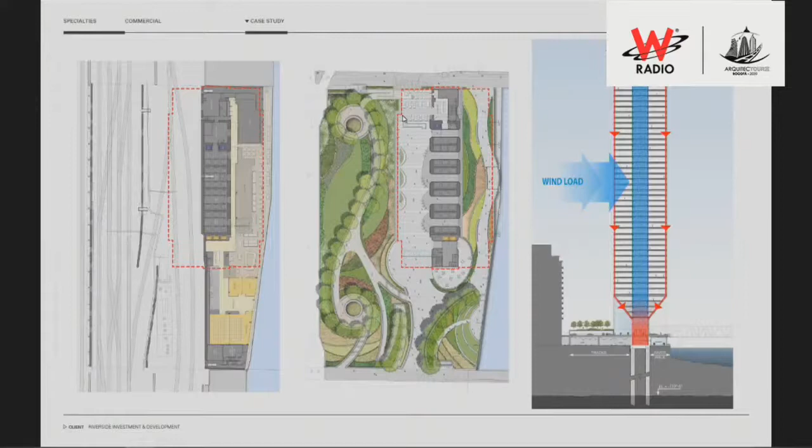So working with Magnusson Klemencic, a very well-known structural engineering firm, we developed a vertical structure that is only 40 feet wide, approximately 12, 13 meters wide, and all of the load comes down into that. And that allows us to then put a park over the railroad tracks and create a building that you can see here. It's a wonderful addition to the skyline of Chicago, and Jim Goettsch designed a very innovative solution.

A second building that is almost complete is very near the first one. It's across the river. It's 153,000 square meters, approximately the same height, 54 stories, and it has some of the same features. We didn't have to deal with railroad tracks, but we still had to provide a river walk as required by the city of Chicago.

And this shows you a good example of how we solved that. In this case, we did not choose to bring down just a core. We were able to bring down columns and collect them at the bottom.

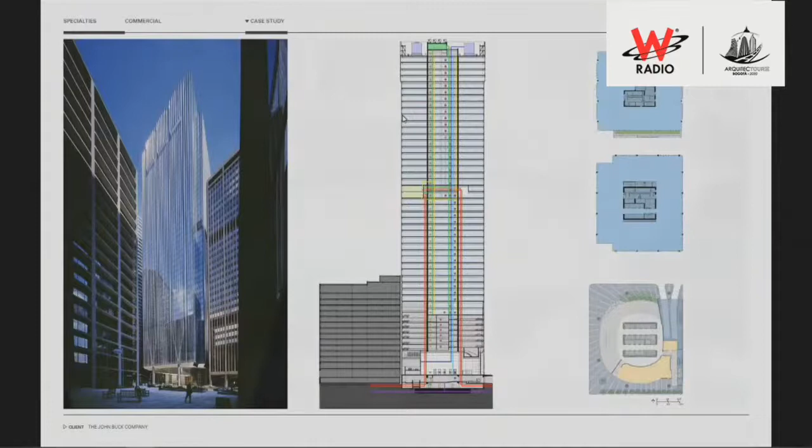111 South Wacker was another building that we had completed approximately 15 years ago, 135,000 square meters, also in the 53, 54 story range. And what was special about this is that the parking is located above the lobby. And what we did, you can see there's a band of parking in the gray, and we created a ramp, an auto ramp that became part of the lobby and became a design element, and yet created a very unique lobby that we think proves to be a very interesting view.

The columns are all gathered and come down into only 8 places for this very large building, but that creates a very open base on what was a very tight and closed site.

300 East Randolph is the home of Chicago's Blue Cross and Blue Shield facility, which is a health insurance company. And they came to us back in the early 1990s, 25 plus years ago, and said, we need to build a corporate headquarters, but we want the ability to be able to add to it. So the initial phase was 132,000 square meters, but the ultimate build out is 218,000 square meters, 57 stories tall.

And what we did is we planned in the first phase the positions for the elevator banks that would allow the building to rise to a new height. And you can see in the picture on the left how the first phase is complete, fully occupied, 4,500 employees, and construction of the second phase happened 10 years later and was done while the building was fully occupied. And then that middle picture shows you the complete building.

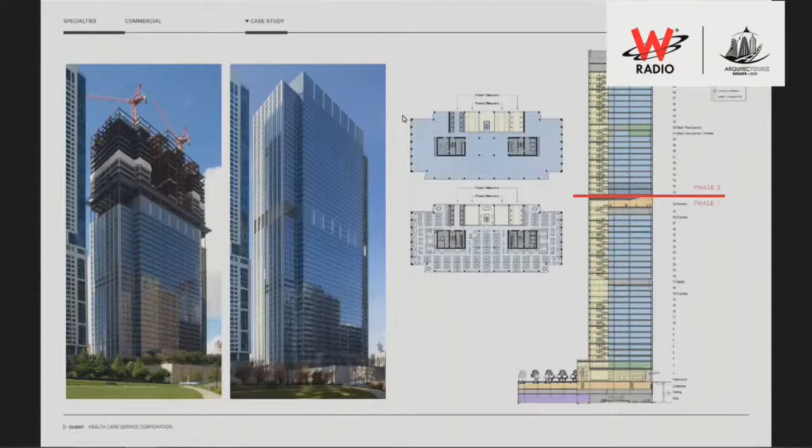And what's happened is that instead of expanding, it turned out Blue Cross Blue Shield found some of the very best tenants in Chicago because this building has a beautiful view of the park. And you can see it here. Millennium Park is in its foreground, and how it sits compared to other buildings, and the beautiful views from it.

We recently completed a project in San Francisco, and this is the Park Tower at Transbay. It's part of a new section of the city. It's only 45 stories and only 75,000 square meters. But what's interesting about this is that this building was fully leased to Facebook before it was complete. So a very good success story for our developers and a very nice project.

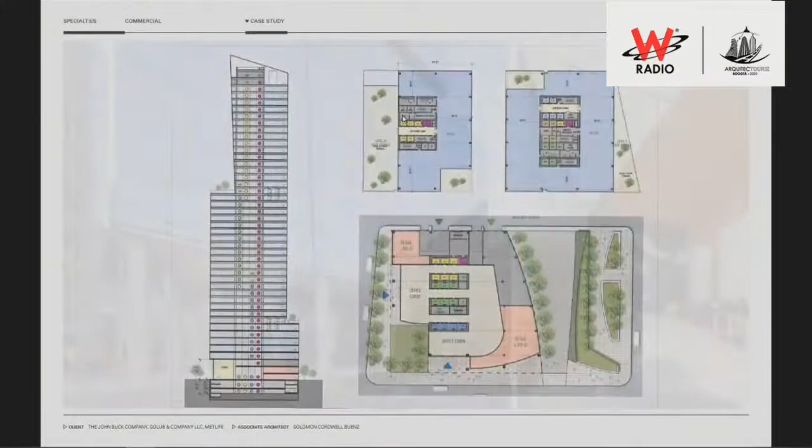San Francisco's climate is a little bit more temperate than Chicago, so what you see are open terraces, which were very attractive to the tenants. They love the ability to have their employees go outside, and here's a good example of that. We built a windscreen so that everyone would be comfortable there, but you're out in the outdoors and it's part of your floor, and it happens every third floor.

A different project for us was the Zurich North America headquarters, about 73,000 square meters. Zurich is an insurance company that does primarily reinsurance, and they're based in Switzerland, but this is their North American headquarters. And what was interesting is that this is sited on an expressway. It's right adjacent to it.

And what they asked us is, we want a billboard. We want, when people are driving on the expressway, that they turn and they look at our building and they can instantly see who we are and that it's something a little bit different. So these are other shots, other sides.

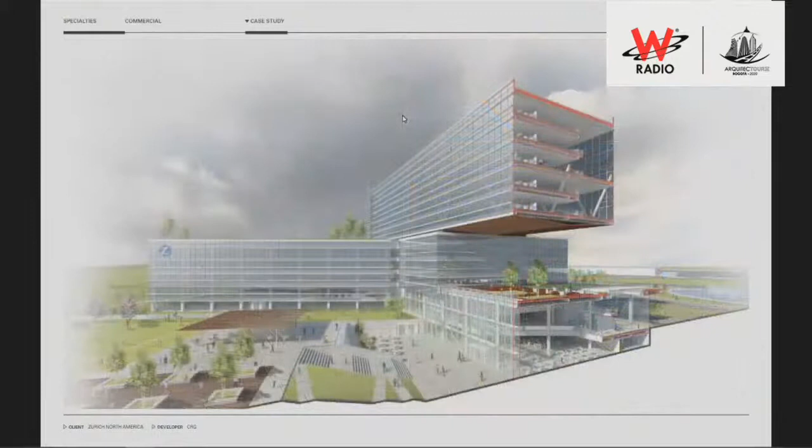And then the final product. You can see it's very striking, and as you're driving, you instantly realize what the building is, and it captures your attention.

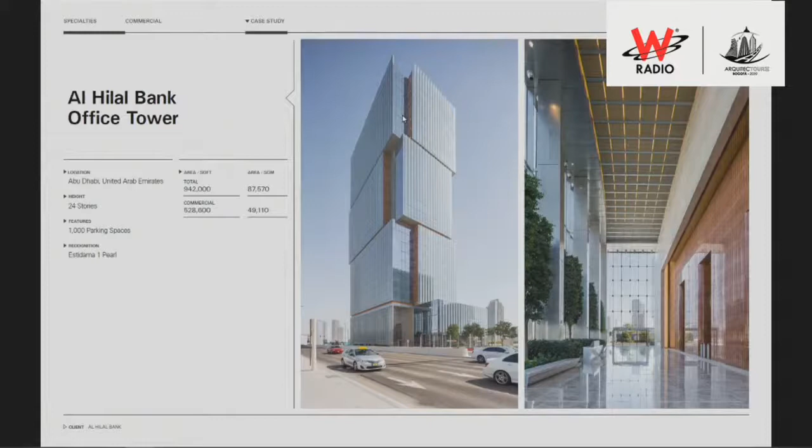A project in the Middle East was for Al Hilal Bank. This is a simple office tower, 87,000 square meters, only 24 stories, a fairly large floor plate. And they are renting this to commercial tenants. They are only taking a small portion of it. This was purely a development project for them.

You can see the large floor plate, column free from the core out to the columns at the edge, which is a hallmark of many of our buildings because that allows for very open planning and is easily able to be changed. They wanted a signature for their building as they were going to develop other buildings, and they really like the offset and the special lighting that happens. And they've repeated this now in their logo and in their other buildings.

A project that is just completed, one of my projects that I work closely with Jim Goettsch on, is in Warsaw, Poland. And this is 115,000 square meters, 35 stories. And the building was somewhat shaped because Warsaw has a sun requirement that you cannot shade other buildings for more than a certain number of hours per day. So the building has to be very carefully sited, shaped, so that you can achieve that.

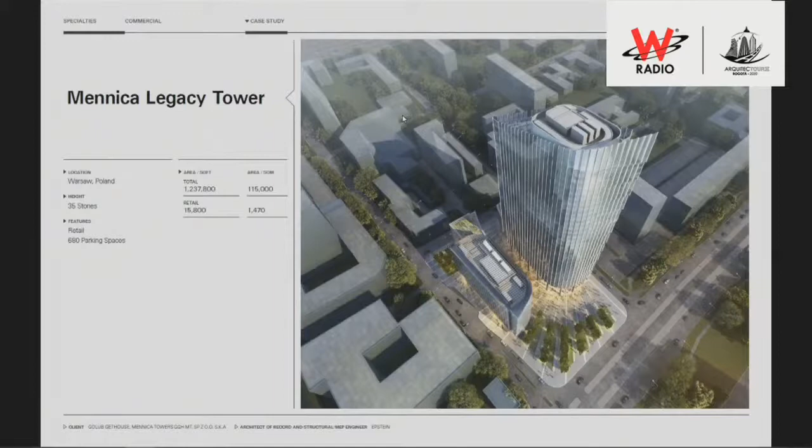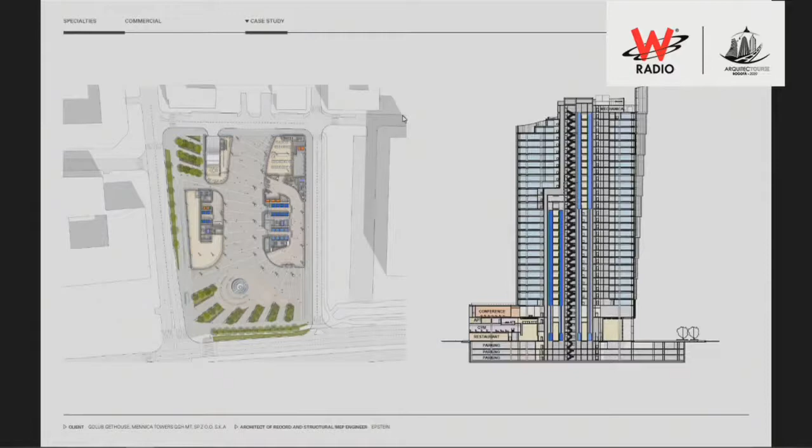And what we did is we broke the building up into two masses. One is the tall mass and one is a shorter mass. This building also was fully leased before it was completed. M Bank, which is a large Polish bank, is taking the tall tower. WeWork took the entire smaller building, as well as a health facility. And you can see it in its completion. Rendering on the left, completion on the right.

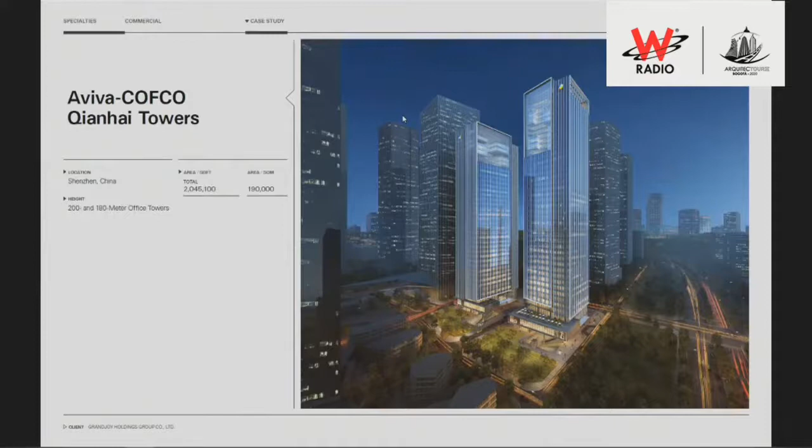Another complex, the Aviva-COFCO, which is located in Shenzhen, China, just outside of Hong Kong. And this is for 190,000 square meters in 2 towers. You can see a little bit of a different expression. Atriums within the buildings, which offer a lot of interest, and they're mostly located up at the very top of the building, so they have excellent views.

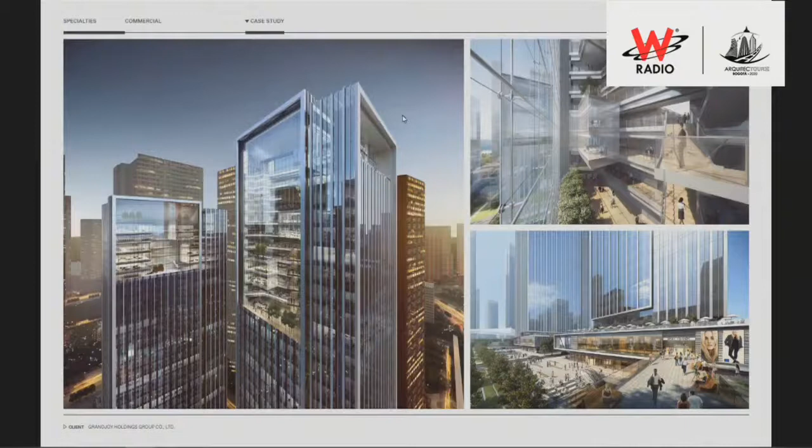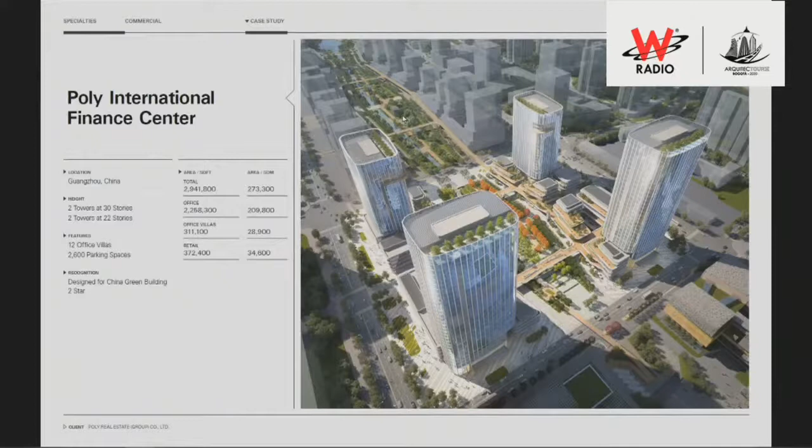Another project, 4 buildings, 4 towers, 273,000 square meters in Guangzhou, China, also not very far, an hour and a half by car from Hong Kong. I'm sorry, 2 at 30 stories and 2 at 22 stories on a retail base. You can see some of the detailing for that. The retail is particularly interesting.

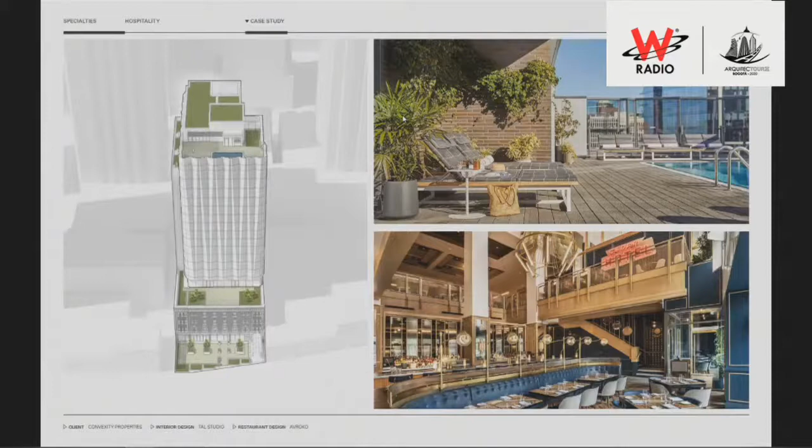We finished it. These are shots of the surroundings. This is right in Chicago's prime restaurant and hotel district. And you can see a shot of how we kept just the front facade and created an all-new building behind it, a 2-story restaurant at the base, a private pool area for the hotel guests, and a bar up on top, and a very innovative room situation. Because the exterior changes, every room is just a little bit different.

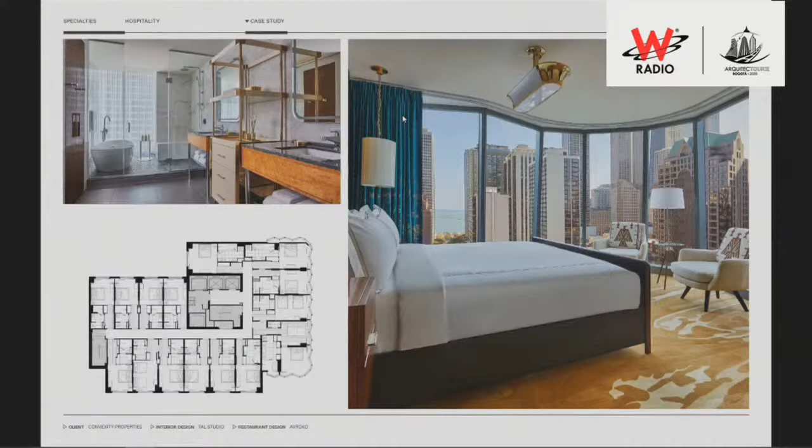Bathrooms on the exterior wall, and while the rooms aren't very large, they're beautifully appointed. And this was done by a group out of Las Vegas called Tal Studio. They were the interior designers for this. A shot of the rooftop bar and the rooftop pool.

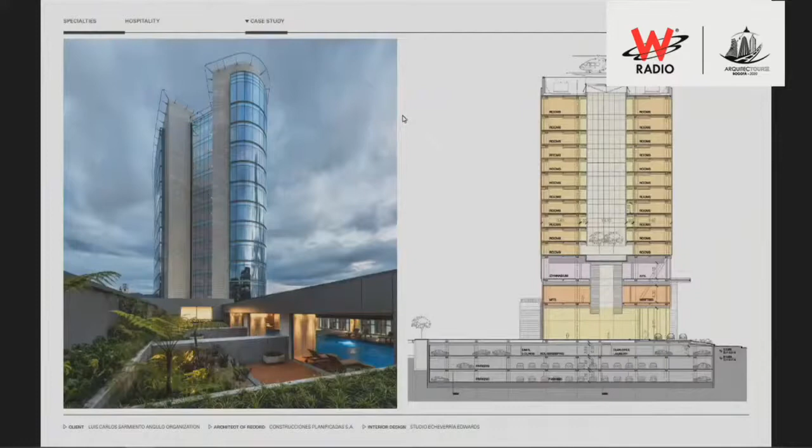And you can see views of the building, a section. A helicopter pad was a requirement at the top. And then the pre-function space to the ballrooms, absolutely beautiful. The pool area, very unusual. And a signature restaurant at the very top offering some of the best views of downtown Bogota and the mountains surrounding it. We're very proud of this project and very proud to have worked with Mauricio and his people.

Another project a little bit older, the Grand Hyatt in Sao Paulo, 55,000 square meters, 26 stories, 466 keys. A project that we think is going to stand the test of time and will serve the Hyatt organization and the developer for a long time. The pool at ground level, a fitness center with a connection down to the pool.

And then a project that was a renovation, an adaptive reuse within a historic building. The Langham in Chicago is 32,000 square meters, 316 keys, and this is 5-star plus. Langham is a brand that is owned by a Hong Kong owner. He bought the Langham in London and is developing Langham hotels throughout the world. This was his first hotel in Chicago, and it's located in the bottom 13 floors of what was called the IBM building at the time.

And this was Mies van der Rohe's final building while he was still alive. It was completed very close to his death. We created an indoor pool, and the rooms themselves are, of course, very clean, very modern, and contain elements of Mies van der Rohe's furniture, etc. So we feel that we captured some of what he was doing.

Some of the projects I worked on in India, the Grand Hyatt Mumbai, 111,000 square meters, the second largest Grand Hyatt in the system when it was completed. It has 547 keys, 110 serviced apartments, and the grounds are modeled after, we worked very closely with SWA, which is a wonderful landscape firm in the US.

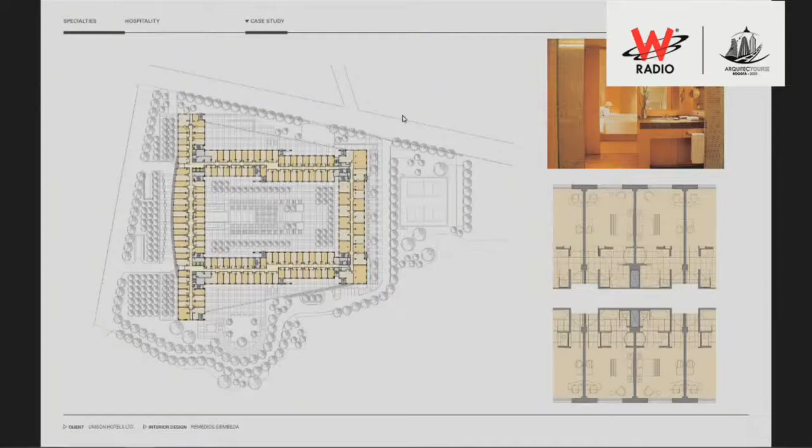They're modeled on Mughal gardens, which was a period of time in India where the gardens themselves were absolutely beautiful, very structured, very organized, and you can see they've contained water features in many places to create a sense of being in the country while being in the very heart of Mumbai, which is a very dense city and only 1.5 miles from the airport, which is why we had to keep the height fairly low.

The second project I completed in India was for the Four Seasons chain. This is also in Mumbai, 23,000 square meters, 202 keys, a smaller hotel, much higher luxury quotient. So this is a true 5-star hotel in Mumbai, and the first Four Seasons in India.

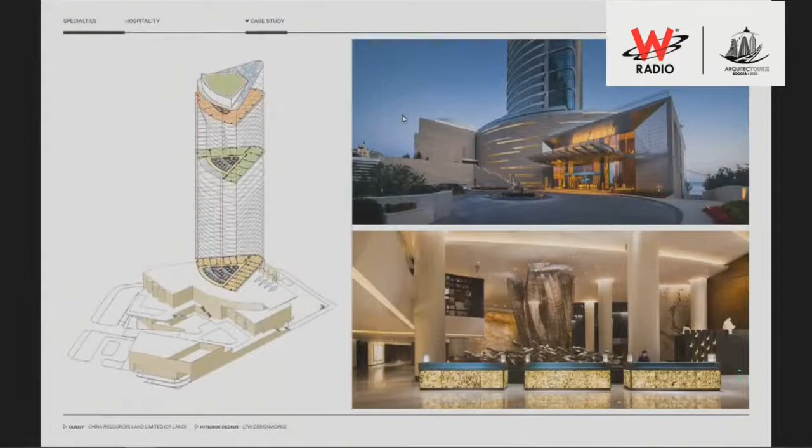We then did a series of hotels and are continuing to in China. This is the Grand Hyatt in Dalian, which is right on the water. This is a port city, 100,000 square meters, 370 keys of hotel, plus 84 serviced apartments at the very top. You can see that organization at the very top of the serviced apartments, a beautiful drive, lovely check-in, and a

And then a resort hotel. This is the Rosewood Sanya, and it's attached to a building we also did, which is the Sanya Forum, which is a conference center. So this is 151,000 square meters, 46 stories, the tallest building on Sanya, 246 keys. Rosewood is a luxury brand, a 5-star brand, 465 serviced apartments. What they anticipated is that many people would want a vacation here for an extended period, so

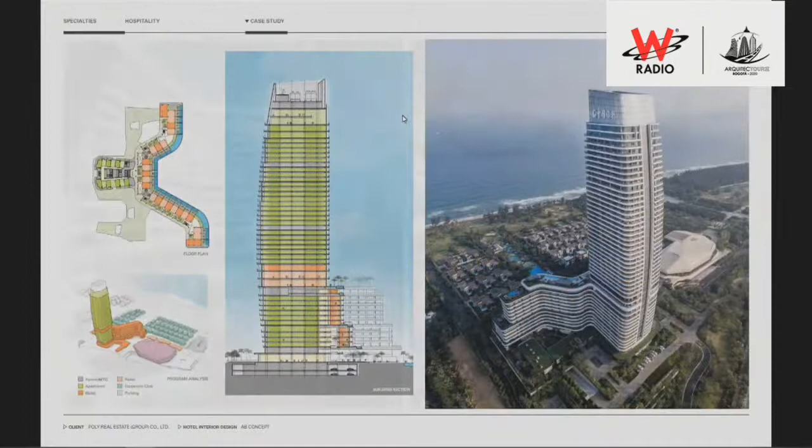an apartment made sense. There's also a set of villas that you see in the base, and this hotel is organized such that the apartments are on top, the hotels at the bottom. Many of them have beautiful ocean views. Sanya is an island. It's like the Hawaii of China. And you can see here an infinity pool that allows a beautiful view of the water. And then the forum, the conference center is on the right, as well as rooftop amenities.

Moving to our residential work. I'm currently working on a project in Chicago that is called One Chicago. It is at the intersection of State Street and Chicago. It's 204,000 square meters, a very large project. We're working in conjunction with another architecture firm, and we are focusing on the very tall tower, the 76-story, almost 300-meter tall tower, which will have 276 rental apartments and then 77 luxury condos at the very top.

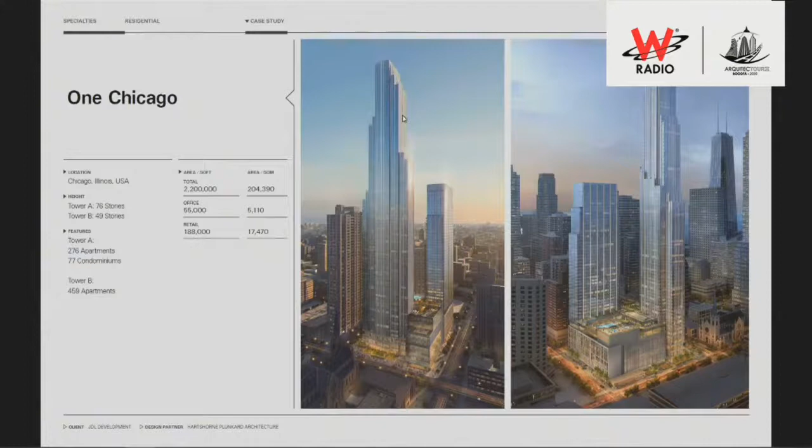The base has been completed. An interesting structure, it's top down. So they drilled the caissons and then started excavating below to create 4 levels of parking below grade. And they're still excavating as we're moving up, and that saved 3 months on the schedule. So very important to the owner.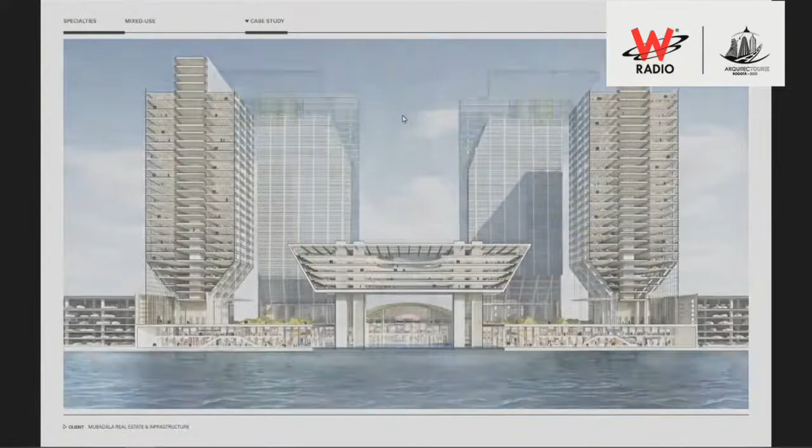Landscape by Martha Schwartz, a very famous landscape designer, very unusual landscape design. And then the buildings are angled such that there is shade at the right times of day for the lobbies. Because Abu Dhabi is a very warm, very sunny climate, Jim Goettsch designed a building that really allowed for it to respond to its environment. The sunshades on the building are also important for keeping track of that.

Here's an example of that trading building. And a shot of the lobby, and shows you how it can be shaded during the day and is very comfortable, protected by trees on one side indoors.

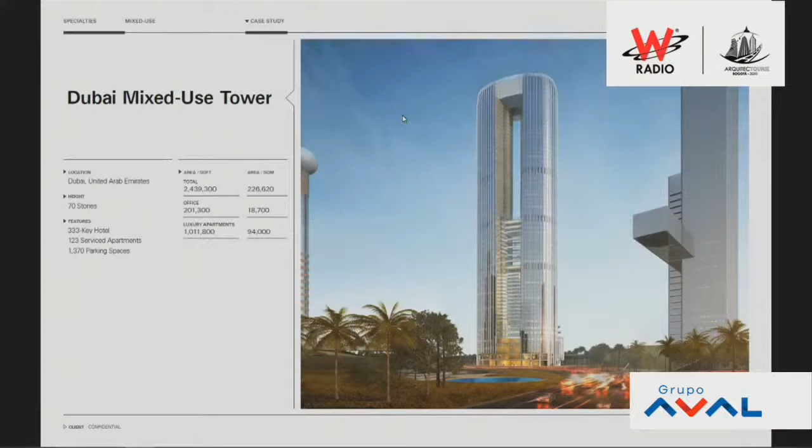A building that we completed design for, the Dubai Mixed Use Tower, 226,000 square meters. This has a small office component, a retail component, and of course, a large parking component, 1,370 parking spaces, as well as luxury apartments and some condos at the very top, based in Dubai, adjacent to Abu Dhabi.

Back in China, the summit was done for Tishman Speyer, a well-known American and European developer. This is in a town called Suzhou, China, which is approximately an hour and a half out of Shanghai. And this is a city that when we started work there 25 years ago, had a population of about 1.5 million. The population is now 12 million.

This particular complex is a total of 150,000 square feet, very pragmatic, very easy to lease, very easy to lay out interior space, and a retail component that spans the street and is connected by a bridge. Other shots of that project. Very simple. Mies, I think, would be proud.

R&F in Guangzhou, China, is a building that started off as a lot of mixed use, hotel, residential, office, retail, and in its final iteration has a Park Hyatt, a 208-key hotel at the very top, and then has primarily office space, 114,000 square meters of office space, with a very small 10,000 square meter retail component at the bottom.

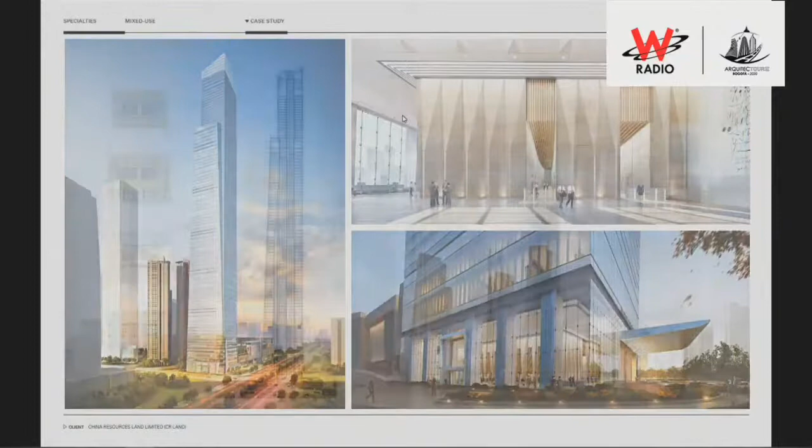Shots of the detail of how the curtain wall is expressed and how the building changes shape as it goes up. And some nighttime shots. The building is almost complete on the right.

A development in Shenzhen, China, 5 towers, a total of 471,000 square meters. These are all, to us, very large buildings, but they've become commonplace in China. Retail base, but primarily office, with a hotel and some serviced apartments. An example of how that's master planned.

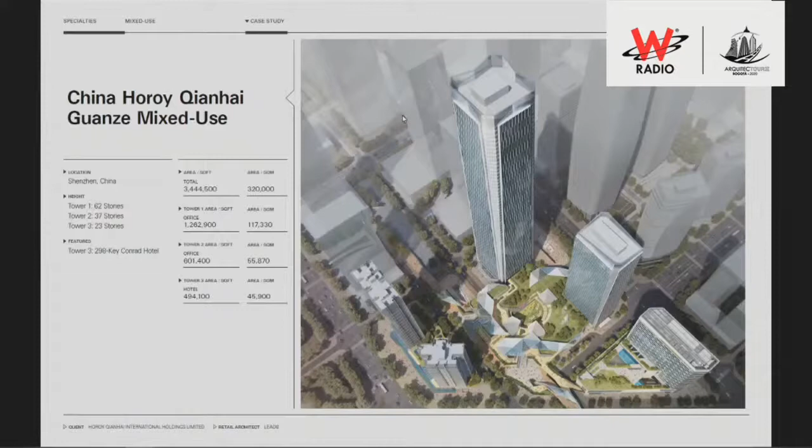And then in Shenzhen, China, a tech city, very close to Hong Kong, a mixed-use development for China Horoy, which is another developer, 320,000 square meters, three office towers, 62 stories, and the others a lot shorter, around a retail base with a hotel in the 3rd tower. And you can see the tall tower. It's going to have a distinctive shape on the skyline, and the Conrad Hilton at the base.

In Wuhan, China, which is the origin of our current issue throughout the world, but has gotten back to normal. This is a project for a developer called Greenland, and it's a 315,000 square meter office tower and a 400 meter tall office tower and a 200 meter hotel and apartment building. Wuhan has recovered nicely, and this is under construction.

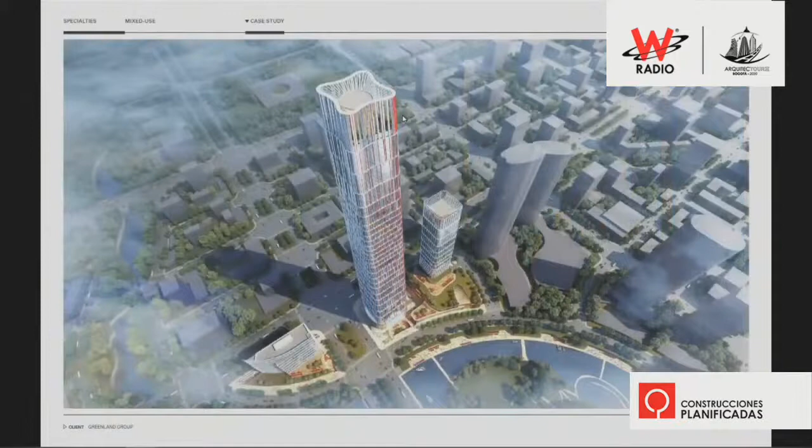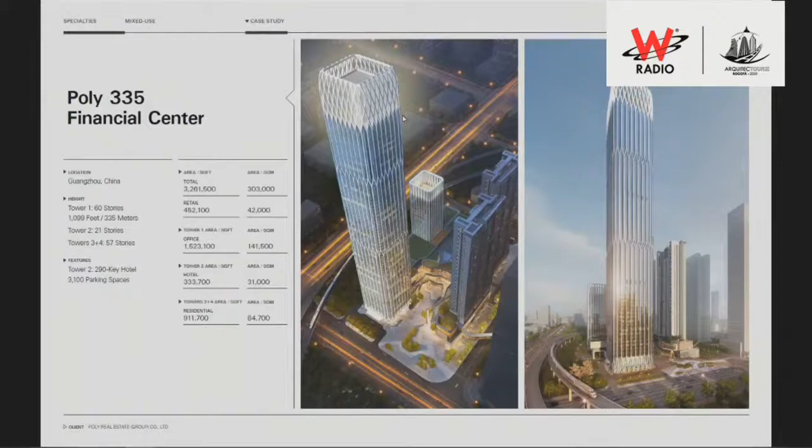In Guangzhou, back to Guangzhou, China, the Poly is another one of the large, very influential developers in China. 303,000 square meters, one tower, 60 stories, 335 meters tall, and a combination of residential, hotel, and office with a retail base. Another shot of that.

And then moving into our fifth, the institutional work that we've created. The Ryan Center for the Musical Arts is located on Northwestern University, and it's located in Evanston, which is just north of Chicago. A small building, but a very complex building, 14,000 square meters, but it has a beautiful recital hall, black box theater, rehearsal rooms, classrooms, faculty offices. It's located right on the water, a very prominent site, a beautiful site.

You approach the building. To your right is the performance center. To your left is the majority of the building. And the performance center has a glass back so that as you sit, you have a view directed directly towards downtown Chicago. And you can see outside nature while the people are playing. It's absolutely beautiful. And for acoustical reasons, we created an undulating wood side. All of the wood veneer was taken from simply 2 trees located from Africa, very large trees. They produced a lot of veneer so that it was all uniform.

We were also the architects with another architect for Soldier Field, which is our football stadium in Chicago, and the 19-acre park that surrounds it. 62,000 seats, and you can see it on the skyline. We took an existing older building and fit a new football bowl into it.

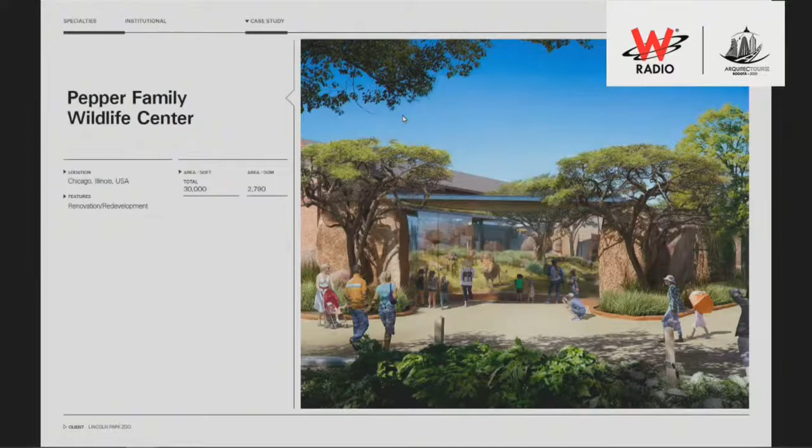And then we're working on a lion house. We completed a great ape house for the Lincoln Park Zoo, which is a large zoo within Chicago, a free zoo. And we're redoing an existing building, an old lion house, but creating an all-new exhibit and opening it up so that people will be able to get very close to and see the lions. And we're looking forward to this being complete. It's in construction as we speak.